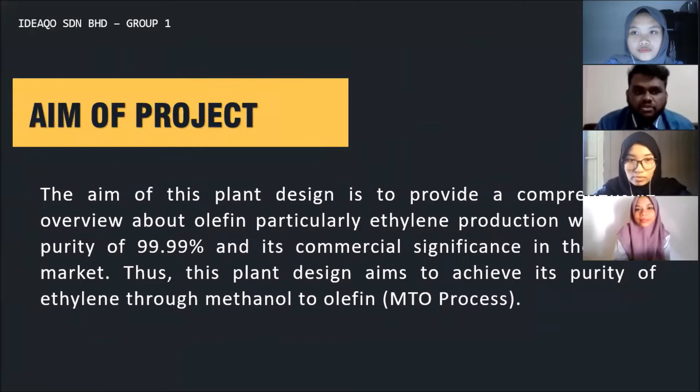First of all, the aim of this plant design project is to provide a comprehensive overview about olefins, particularly ethylene production with a purity of 99.99% and its commercial significance in the global market. This plant design aims to achieve this purity of ethylene through the MTO process, which is methanol to olefin.

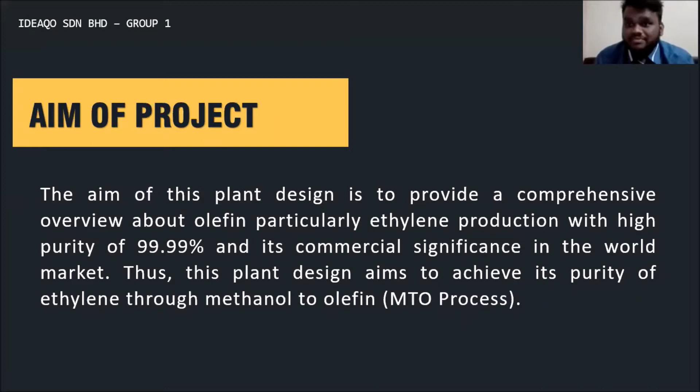The first process for this plant design is the feed, which is methanol at 4.2568 kilomole per hour, converted from 100 ton per month of methanol consisting of ethanol and water with 0% DME. This first feed will go through a pump, which is used to increase the pressure of the fresh feed from 1 bar to 16 bar.

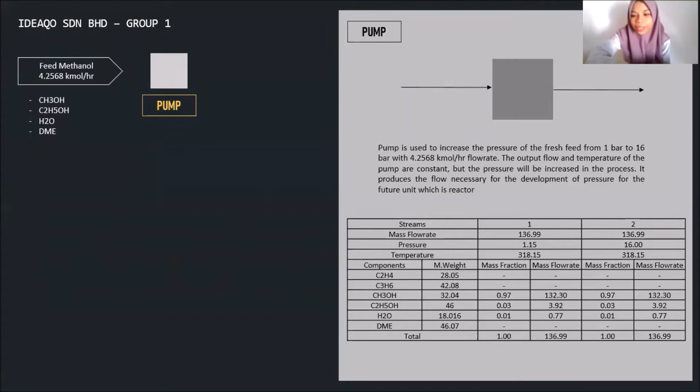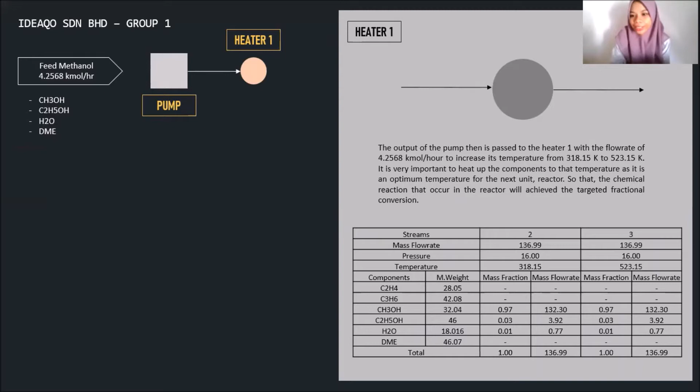The next unit is Heater 1, which is used to increase the temperature from 318 Kelvin to 523 Kelvin for the next unit.

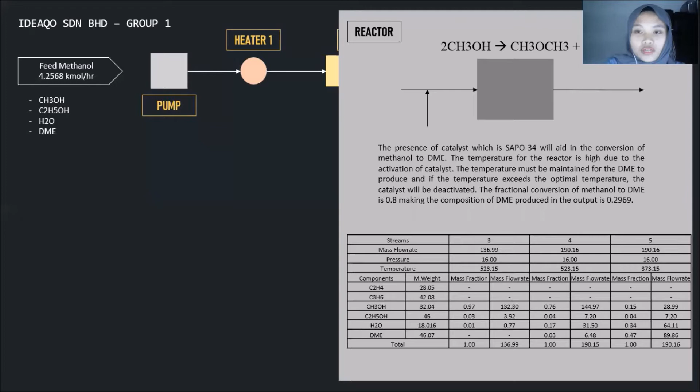Then we go on to the reactor. This is an isothermal reactor purposed to convert methanol to DME. As it is isothermal, the temperature remains the same from inlet to outlet, at 523.15 Kelvin and 16 bar. The next unit is the cooler.

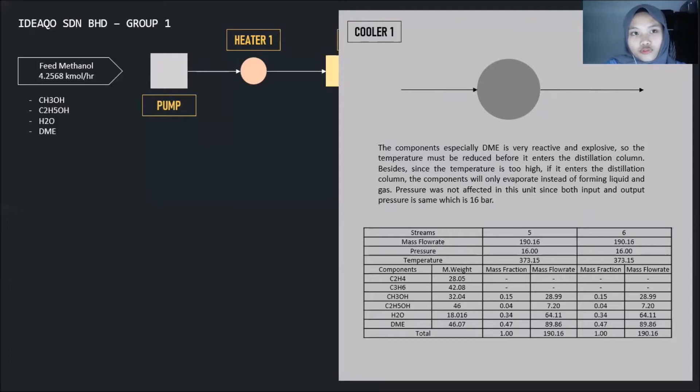The cooler will cool the stream from 523.15 Kelvin to 373.15 Kelvin, so that it reaches an optimum temperature before entering the distillation column.

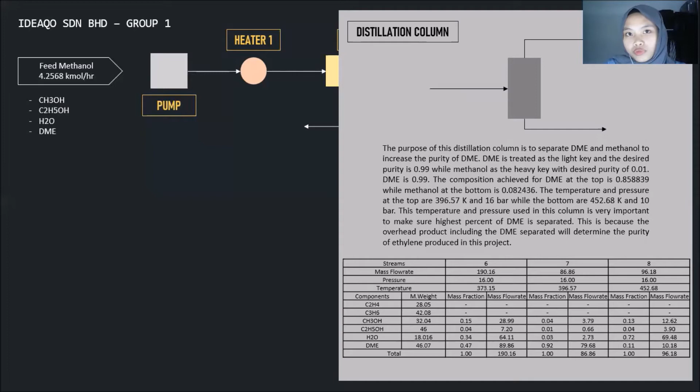For the distillation column, there are two streams, the upper stream and the bottom stream. The bottom stream will be at 452.68 Kelvin and the upper stream at 396.57 Kelvin. The purpose of this distillation column is to increase the purity of DME, and the bottom stream will be recycled later to the reactor.

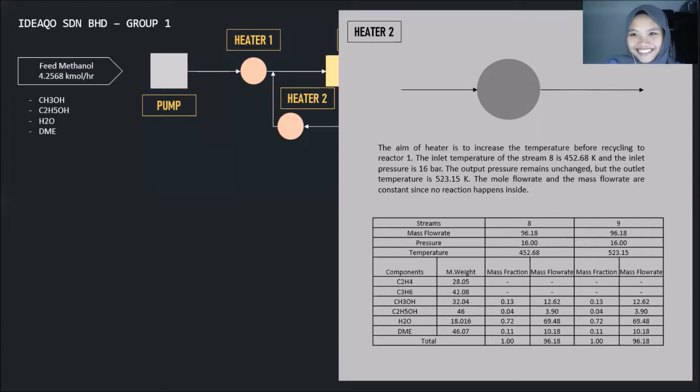For Heater 2, the aim is to increase the temperature before recycling to reactor 1. The inlet temperature of stream 8 is 452.68 Kelvin and the pressure is 16 bar, and the temperature is increased to 523.15 Kelvin.

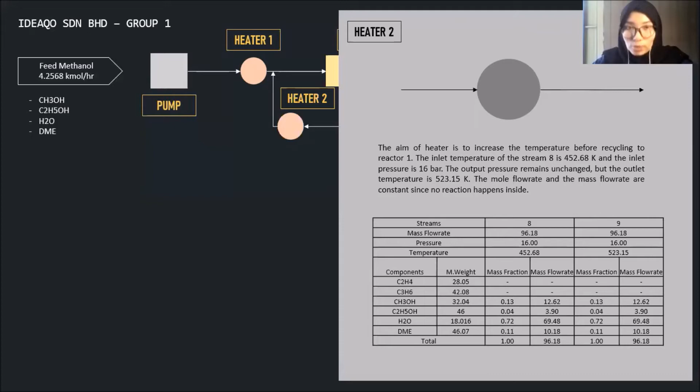For Heater 3, the distillate from the distillation column is passed to Heater 3. Heater 3 increases the temperature from 396.57 Kelvin to 723 Kelvin at 16 bar.

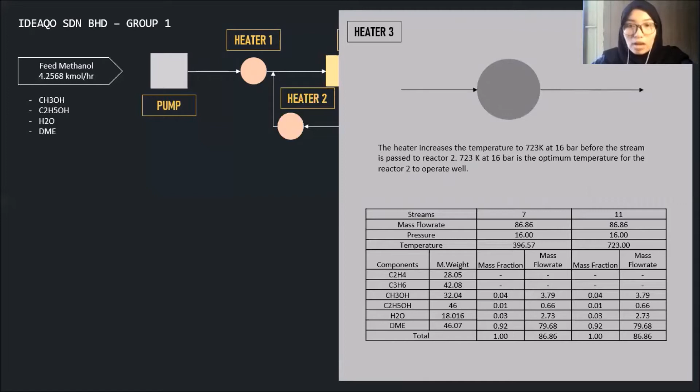For Reactor 2, the stream that enters Reactor 2 is assumed to be in an isothermal reactor. The purpose of this reactor is to convert DME to light olefins such as ethylene, and the outlet temperature remains the same, at 723 Kelvin and 16 bar.

For Cooler 2, the purpose is to reduce the temperature from 723 Kelvin to 323 Kelvin. The pressure is not affected in this unit since both input and output pressure are the same, at 16 bar. The composition of the components does not change in this unit either, because there is no reaction occurring.

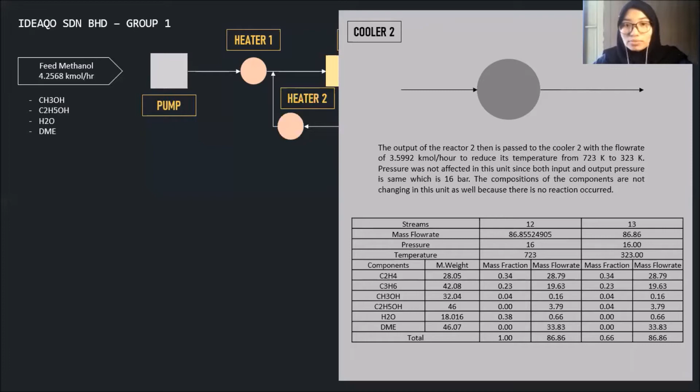The next unit is the dryer. The purpose of this dryer is to remove water components so that the mole composition of ethylene will increase. In this unit, we assume that 100% of the water is removed from the dryer. This stream consists of other components at 1.6288 kilomole per hour at 293 Kelvin, and the outlet pressure for both streams is constant at 16 bar.

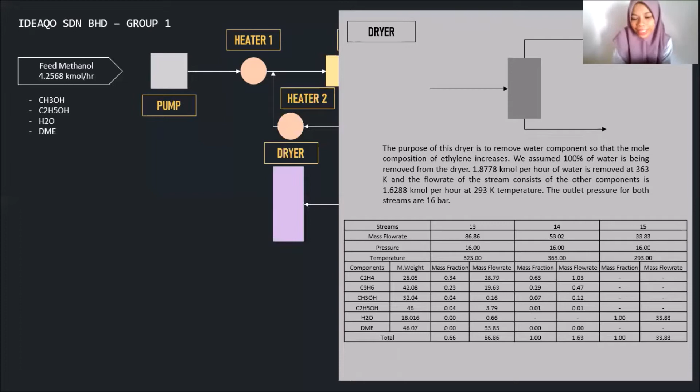Next is the condenser. This condenser is used to condense the vapor to liquid, which is the optimum phase for the de-ethanizer, the next unit. The temperature leaving the condenser is 204 Kelvin at 16 bar, and no reaction takes place since it is a minor unit.

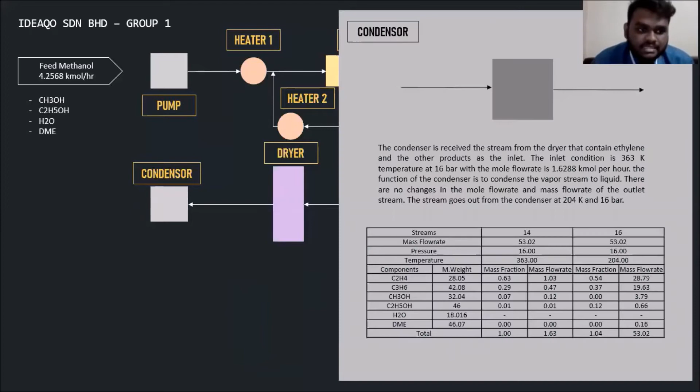Next, the de-ethanizer. From the condenser, it enters the de-ethanizer, which mainly separates the light olefins such as ethylene and propylene from the bulk component, helping to achieve 99.9% ethylene in the final stream. Unfortunately, we couldn't achieve 99.9% purity of ethylene, so we added another column. The top overhead product, ethylene and propylene, has a lower boiling point compared to the other bulk components, so it stays at the overhead while the other components go to the bottom. The bottom is removed, and the overhead enters the next unit, which is fractionation.

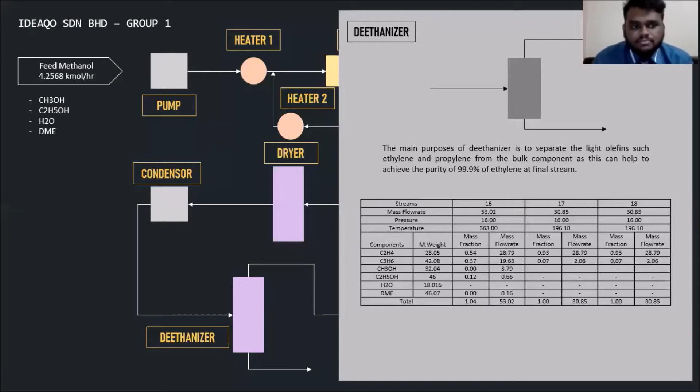This fractionation step increases the purity of ethylene up to 99.9%, and we were able to achieve 99.4% purity of ethylene using fractionation at constant pressure and temperature of 196 Kelvin.

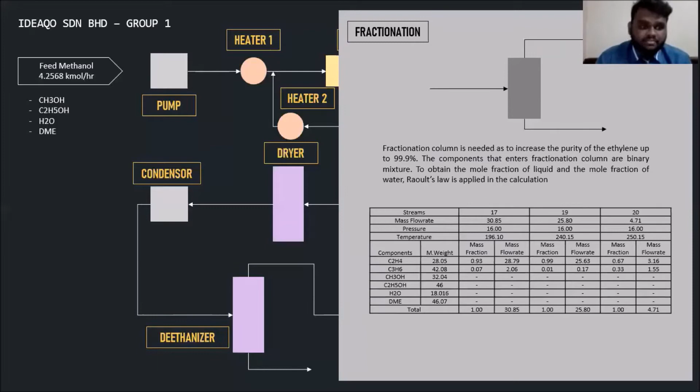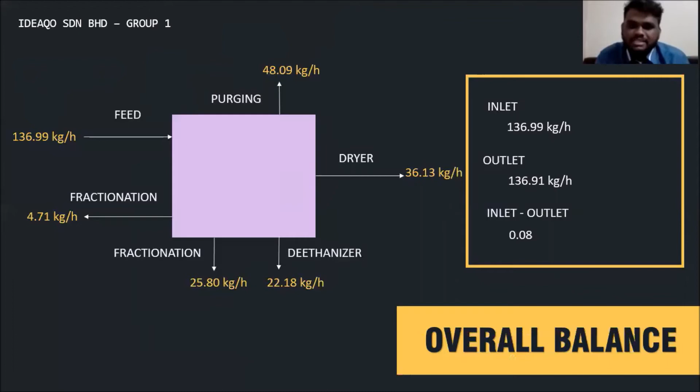This will be our overall balance, where there is one feed of 136.99 kilogram per hour, and five outlets with purging, dryer, de-ethanizer, and two fractionation streams. If we sum up all the outlets, we get 136.91 kilogram per hour, while our inlet is 136.99 kilogram per hour. When we minus it, we get 0.08. It should be 0 due to some round-off error in calculation, but there's some insignificant error of 0.08.

Next is our block flow diagram. Since it's too big, we compressed it into the presentation slide, so it's not very clear, sorry for that.

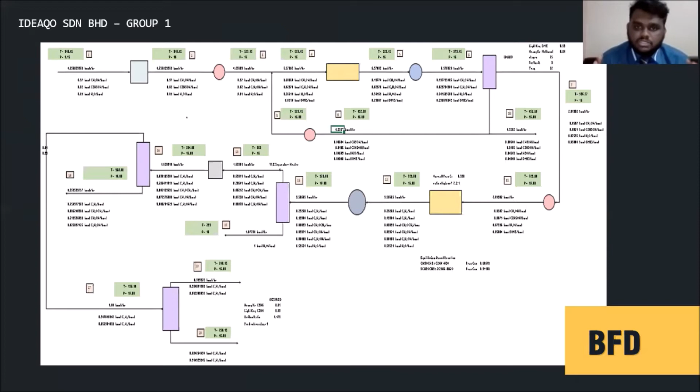This is our process flow diagram, where you can see from the tank until we achieve our desired product, ethylene with 99.4% purity.

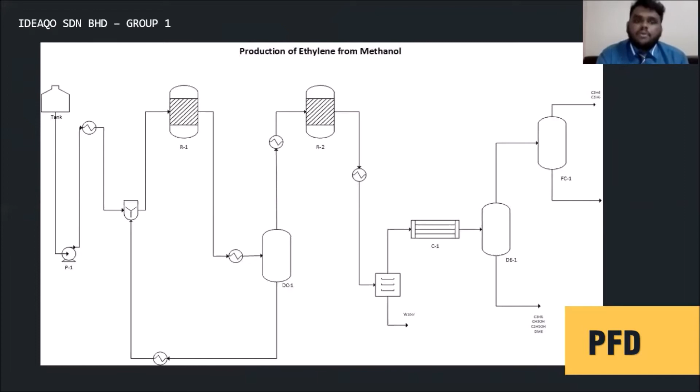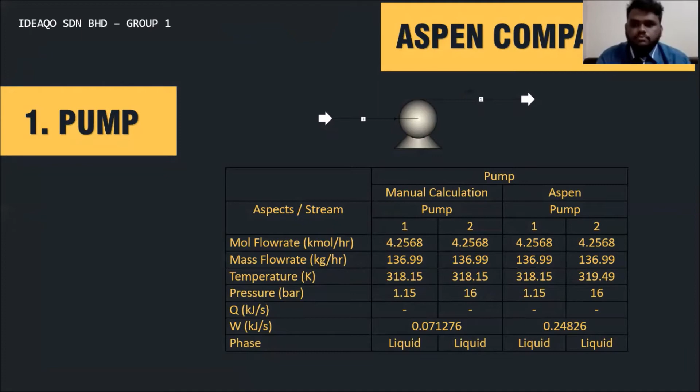So even though the work required is less, there is a difference between manual calculation, which is 0.071276 kilowatt, and Aspen calculation, which is 0.24826 kilowatt, due to a small temperature difference.

For the next unit, the heater: based on the table, heater 1 increases temperature from 318.15 Kelvin to 523.15 Kelvin, while heater 2 goes from 433.83 Kelvin to 523.15 Kelvin. The temperature also shows a slight difference between manual calculation and Aspen calculation.

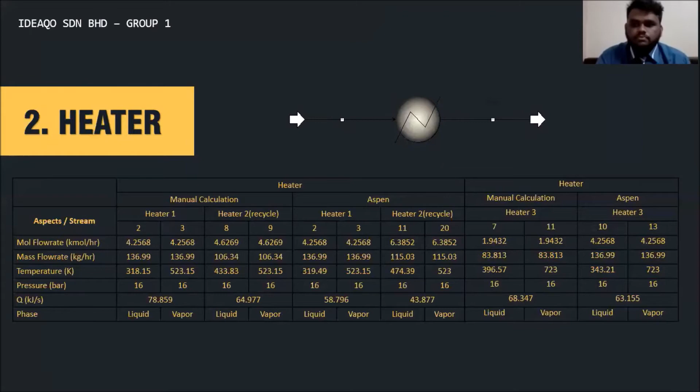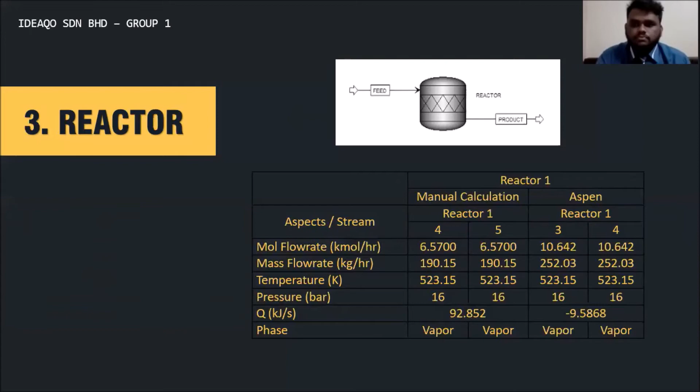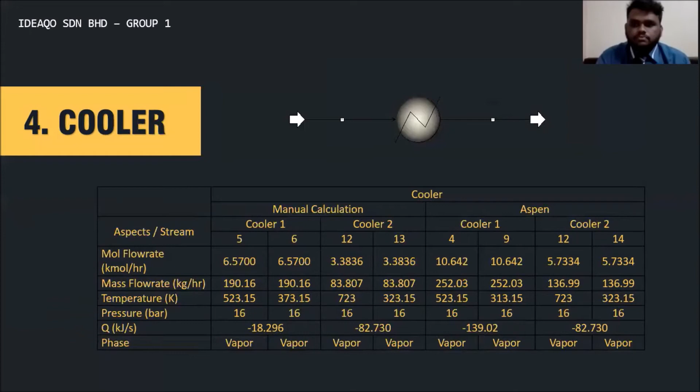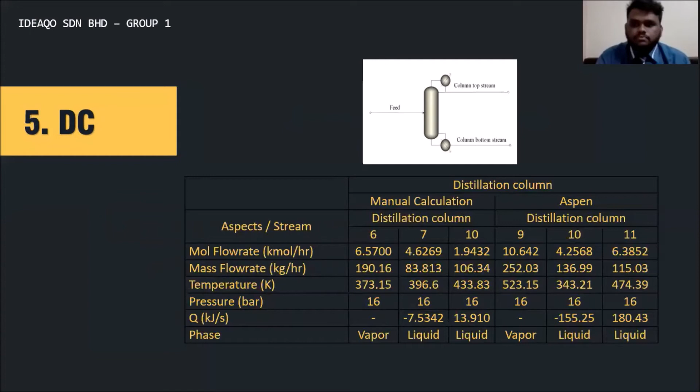As explained before, this is because we set the bottom-to-feed ratio at 0.6, so it has higher flow rates in the lower stream, and it needs more energy to maintain its optimum temperature.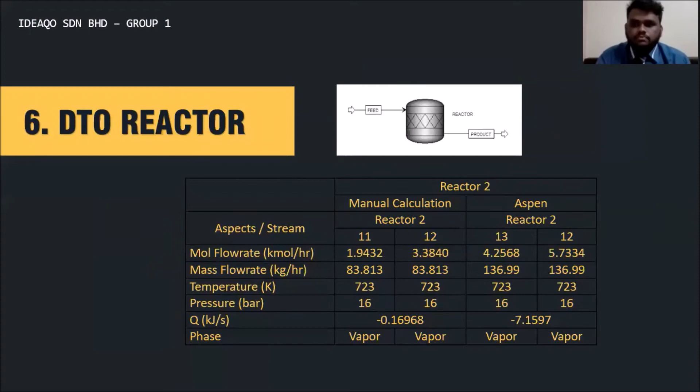As for the DTO reactor, there are some differences between manual calculation and Aspen, relating to the energy rate and also the Q, because the mole flow affects the calculation of Q. The pressure is the same and the temperature is the same because the reactor is an isothermal reactor.

So the next unit is the dryer. As can be seen on the table, the only difference is in the mole and mass flow rates, where Aspen shows higher values compared to the manual calculation. As Farah explained earlier, the difference is because of the presence of recycled streams which affect the flow rates, as in Aspen there is no purging occurring compared to the manual calculations.

From the manual calculation, the temperature varies since the product stream was calculated using Raoult's law, while in the Aspen simulation it was calculated as a flash, where high volatile components discharge in vapor phase while low volatile components discharge in liquid phase. Since water has a very high boiling point, all the water is removed in liquid phase and other components enter the next unit.

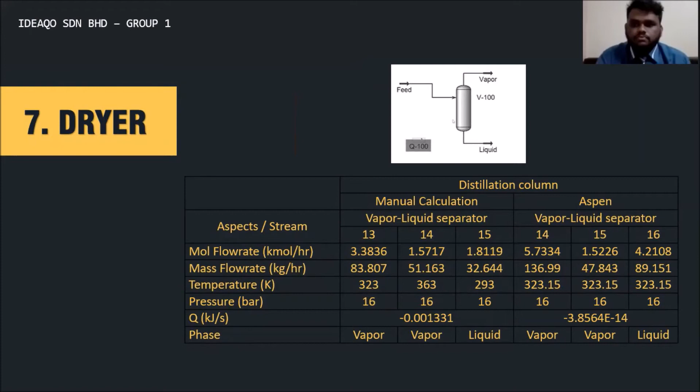Okay, next is the condenser. There's a significant difference in mole flow rate and mass flow rate. It is because, as my previous group members said, there's purging occurring in manual calculation, but in Aspen simulation there's no purging, so there's a slight difference in mole and mass flow rate.

And the temperature difference here is that, as everyone can see, manual calculation gives 363 and Aspen gives 323. It's because in manual calculation we determine it according to the journal, while in Aspen, the software will calculate it for us for the outlet part, especially for the reactive part. So there's some difference in temperature.

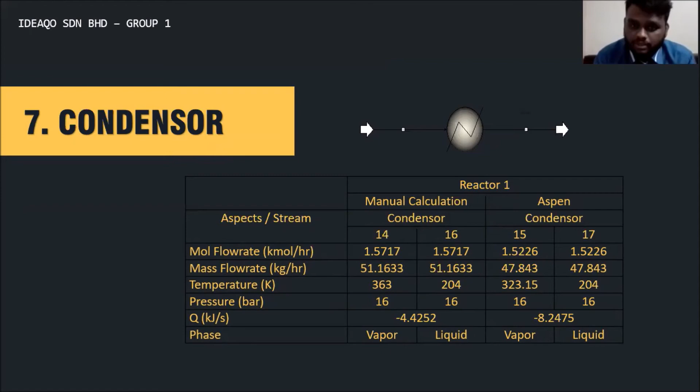Next is the de-ethanizer. For the de-ethanizer, the mole and mass flow rate still have a significant difference due to the purging stream. Then the temperature, as I said before, due to the previous unit, for Aspen it will calculate for us, so there's a slight difference. Due to the temperature difference, the energy also differs here.

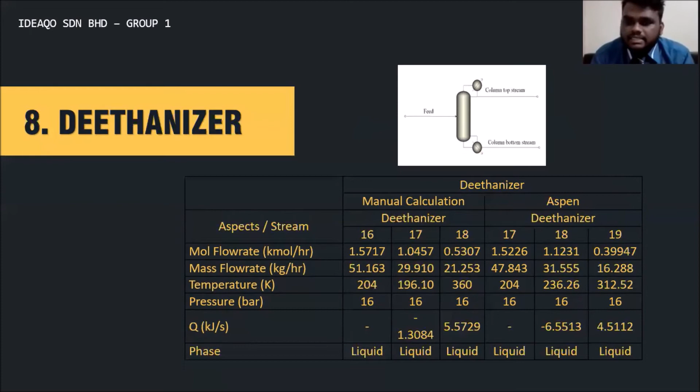So over stream 17 for manual calculation and stream 18 for Aspen calculation, we can see there's a negative value. It is due to the presence of a condenser where heat will be released, and at the bottom there's a reboiler, so heat will be absorbed. So there will be a positive for stream 18 for manual and stream 19 for Aspen, and here all the components are in liquid phase.

Okay, this will be our last unit, the fractionation, for our manual calculation. Fractionation is the last unit for our manual calculation, but for Aspen simulation there's no fractionation. It is because in Aspen simulation for the de-ethanizer, we were able to achieve 99.6% purity of ethylene, due to the temperature difference and the flow rate difference.

However, for the manual calculation, we were not able to achieve that purity using the de-ethanizer alone. We only achieved 94% purity of ethylene. So we added a fractionation unit to increase the purity of the ethylene.

So from the fractionation in manual calculation, we get 99.4%, which is slightly lower compared to the Aspen value of 99.6% in the de-ethanizer. So in Aspen simulation, if we add fractionation, it would be a huge loss because this is a major unit.

And from the manual calculation, we're able to calculate the stages needed for fractionation. It needed only 2.3 stages because the inlet purity is already quite high, 94%, for the fractionation, and the outlet is 99.4%. So we need only 2.3 stages, which proves our hypothesis.

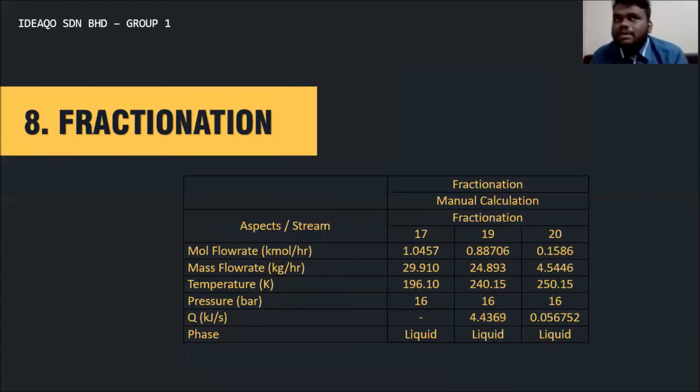Okay, so the recycle stream was added in order to utilize the waste in a useful way. The recycle stream is chosen from the distillation column to the reactor in order to increase the purity of DME, which is our most desired component in the MTO process.

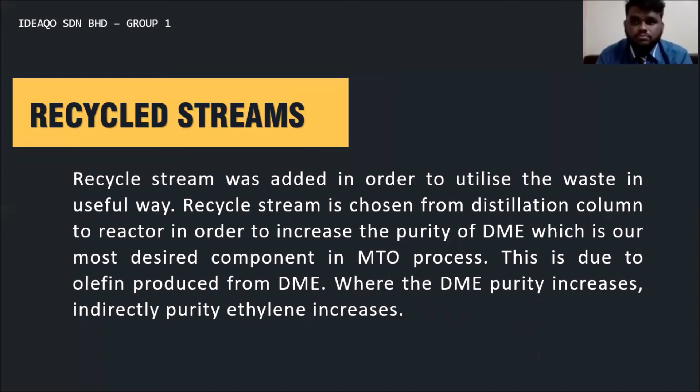This is because olefin is produced from DME, so where DME purity increases, indirectly ethylene purity increases. So it has three stages that we will explain later: the recycle stream that we choose, the purging occurring, and the mixing and final flow rate that will enter the reactor.

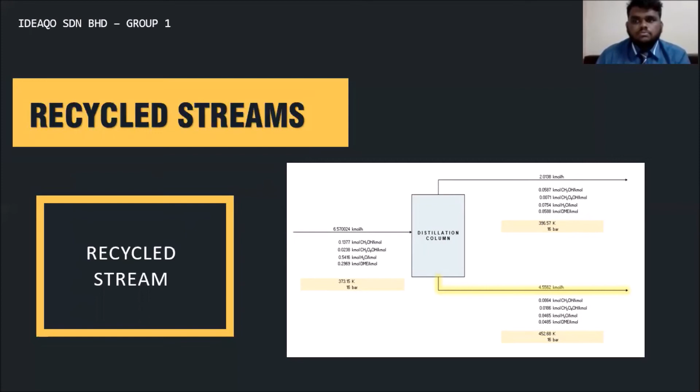Okay, so for the recycle stream, we decided to choose the bottom stream of the distillation column. This is because the composition of the bottom stream consists of methanol, ethanol, water, and DME, so it acts as the raw materials for the reactor. Before it enters the reactor, it passes through a heater so that it increases the temperature before entering the reactor inlet. So the composition itself will increase the purity of DME that occurs, thus increasing the purity of ethylene.

Next, for the purging, since the outlet of the bottom stream of the distillation column is 4.5562 kmol per hour, it will undergo purging with the same composition at 2.2781 kmol per hour. So the purge stream is one where a portion of the recycle stream is removed from the system in order to avoid accumulation of undesired material in the recycled stream.

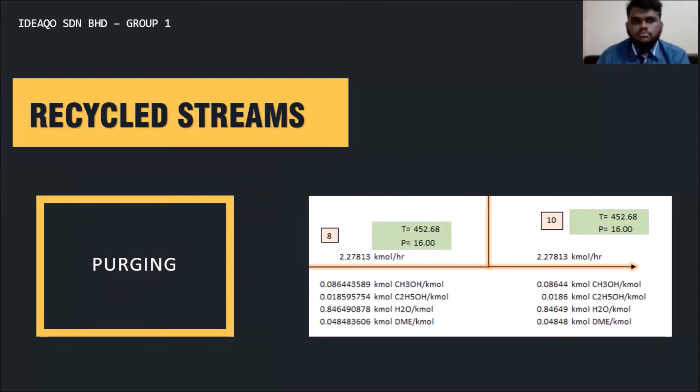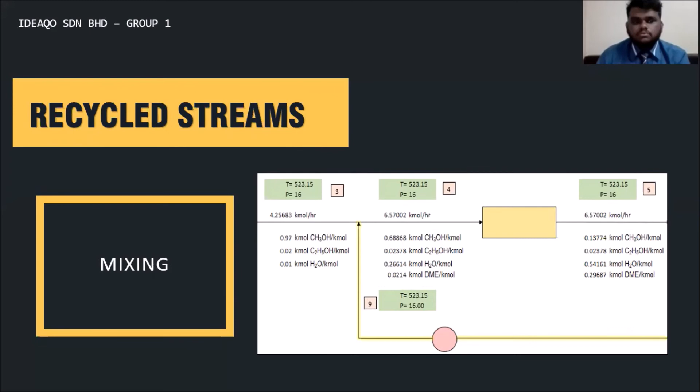For the mixing, the outlet stream from heater 2 comes in contact with the outlet stream from heater 1 and becomes a new stream for the inlet of reactor 1. The flow rate increases because the two streams were in contact.

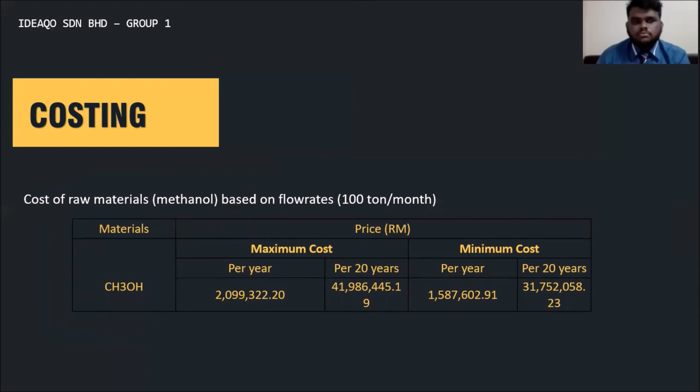Okay, so for the costing, this is for our economic analysis. This is the cost of raw materials, methanol with 97% purity, that we decided to buy from China, and this is the price for 2019, based on 100 tons per month of feed. This is the results of calculation for maximum cost and minimum cost per year and per 20 years.

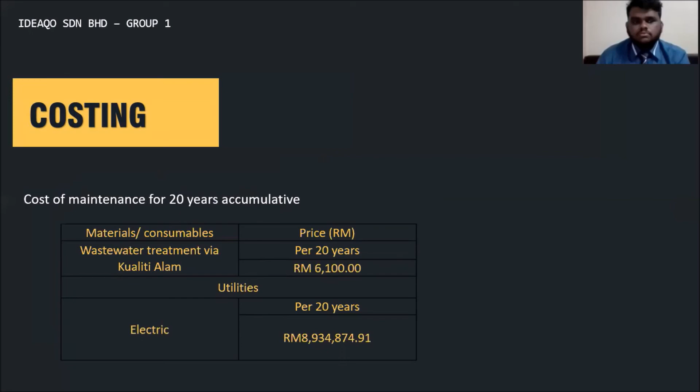Next is the cost of maintenance, which consists of wastewater treatment, Kualiti Alam, and also electric. These two are considered to be the maintenance and will be calculated in the maximum profit later. The wastewater treatment is 6,100 for 20 years, and the electric will be 8,934,874 ringgit for 20 years.

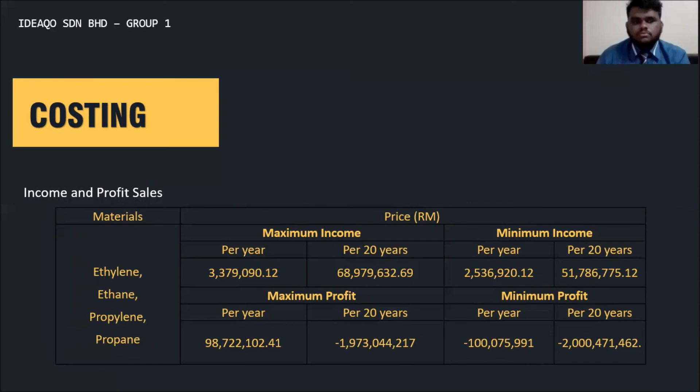Next, we will now proceed to the feasibility of design. First, in terms of technical feasibility, this design plant is technically feasible. This is because this design only requires 7 main units, which is in its minimum range, and uses reliable resources when it is being operated.

Secondly, in terms of economic feasibility, this design plant does not have its viability and it is not economically feasible as well. This is because based on the economic analysis made to make the cash flow, our company is still operating at loss after 20 years being operated.

Thirdly, in terms of sustainable development, the two most widely used components to make plastics are ethylene and propylene, and both have traditionally been derived from crude oil. It also produces the highest yield of light olefins at the lowest cost of production, with the lowest catalyst consumption and the lowest operating costs.

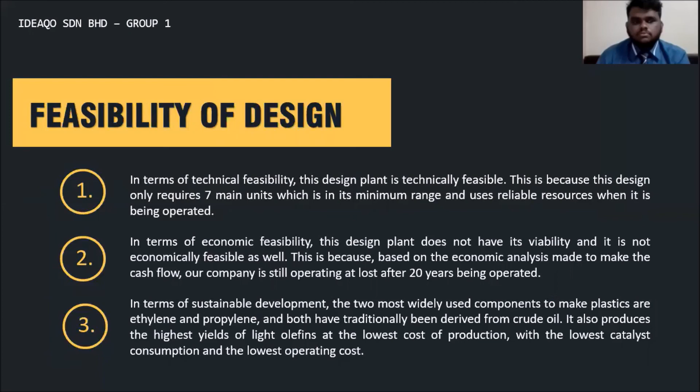In conclusion, the MTO process that our group has chosen consists of two stages. First, the methanol is converted into DME, which is dimethyl ether, and then from DME to olefin, we call that the DTO process. By feeding 100 tons per month of methanol, our company can produce 199.009 tons of ethylene per year.

From the process, our final product should be ethylene, propylene, and all these products are sold in the market. As for SAPO-34, the catalyst used in the reactor helps achieve high conversion in the reactor. The purity of ethylene produced is 99.4%. The number of stages in the fractionation column is 2.3, including reboiler, and the reflux ratio is 1.179.

From the calculation of costing, the maximum income calculated is 68,979,632.69 ringgit Malaysia, and the minimum is 51,786,775.12 for 20 years.

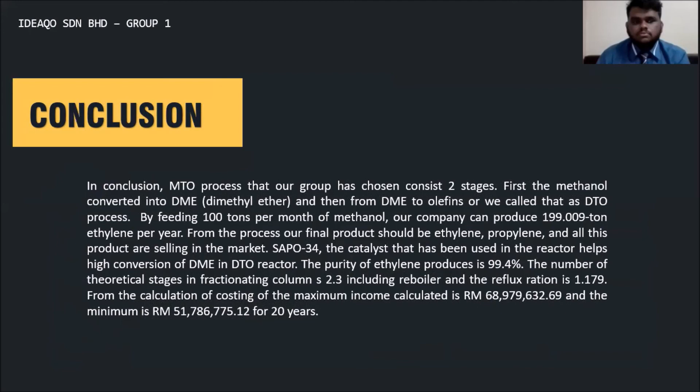For the recommendation, first we have to reduce units to save costs. We have to do more research on the units, and as I said, from Aspen, we have reduced one unit, the fractionation, which is a major unit. It can lead for us to costing, maybe to reduce the major unit.

Second is waste treatment should be handled carefully for environmental safety. Since we are using two different reactors, it should be considered.

And the third is use a distillation column with high temperature so the purity of ethylene can be achieved, although it might incur higher maintenance and production costs.

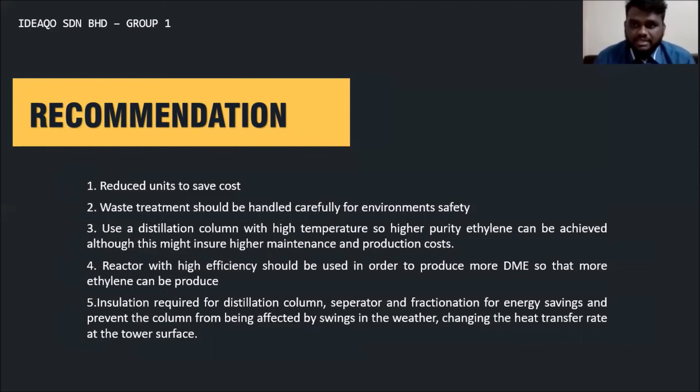And the fourth is a reactor with high efficiency should be used in order to produce more DME so that more ethylene can be produced. And the last is insulation required for the distillation column, separator, and fractionation for energy savings and to prevent the column from being affected by swings in the weather, changing the heat transfer rate at the tower surface, due to the existence of the condenser and the reboiler.